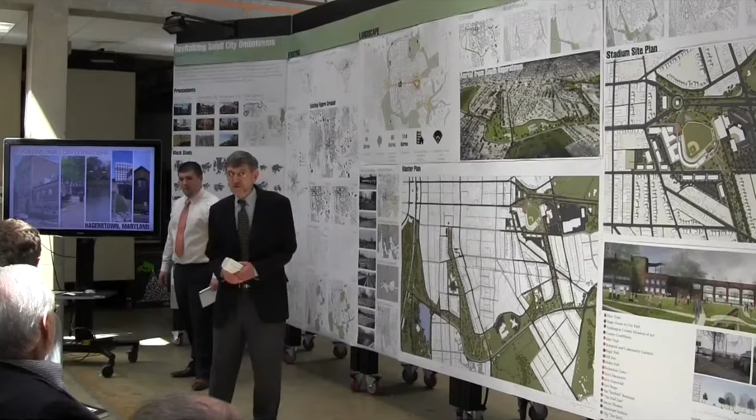The exotic Copenhagen. Tim McCartney is equally exotic. Hagerstown, Maryland.

Good afternoon, my name is Tim McCartney, and my thesis deals with revitalizing small city downtowns, and as Herb just said, it's in Hagerstown.

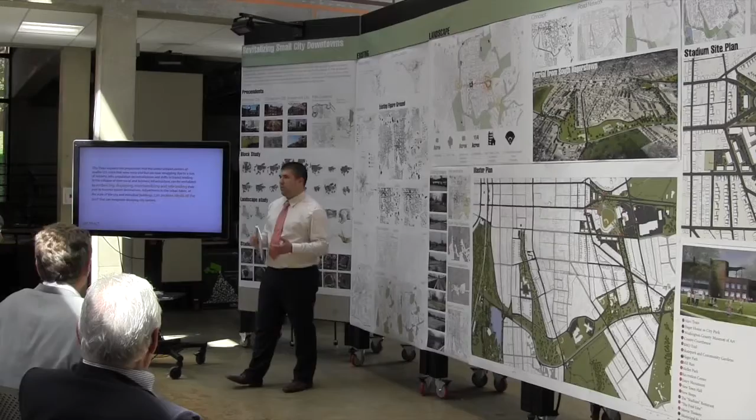To place Hagerstown in the state of Maryland, it is in Washington County, in western Maryland, and it's still considered part of the Baltimore-Washington D.C. metropolitan area. In Washington County, Hagerstown is located to the northeast, and it's the seat of the county, so all the little cities form around it.

This is an aerial of what it currently looks like, where the hospital has been removed.

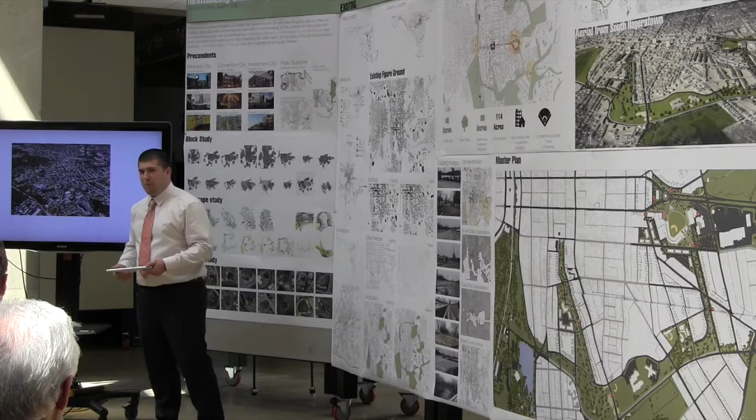The history of Hagerstown: it was formed in 1762 by Jonathan Hager. In 1810, its first census had its population at 2,342. In 1814, when Washington County separated from Frederick County and Hagerstown became the seat, they changed its name to Hagerstown from Elizabeth.

In 1862, it became a staging area for the Battle of Antietam in the Civil War. There is a historical cemetery that sits right here with a lot of Confederate soldiers buried in it. Then in 1867, this is when all the industry really started to form Hagerstown.

It affected the grid of the original city of Hagerstown, as the railroads used to actually make a complete loop around the city, effectively naming it the hub city. There was a lot of railroad and industrial traffic within the city.

In 1960 to 1980, interstates came around, and all that industry pushed toward the interstates because shipping was cheaper. Everything shifted outward, people moved to the suburbs, and the population started to decline.

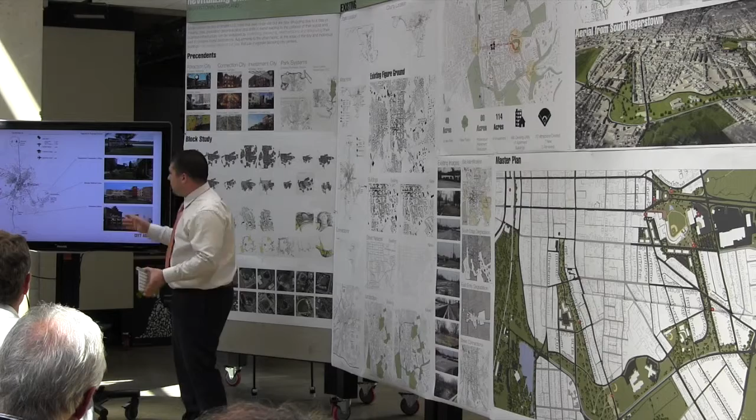Hagerstown also has a ring of shopping around it, and the Meritus Medical Center, which is brand new—they moved the hospital out of downtown to build it. They also have their own airport and a series of shops, and the Antietam Battlefield is only located 11 miles outside the center.

Right now Hagerstown is still pretty connected to the DC metropolitan area by Interstate 70 and 81. Maryland still owns the existing right-of-way of the old Western Maryland Railroad, which is currently just sitting there, which could be a huge opportunity.

As we get closer to downtown, you start to see that Hagerstown has a huge cultural center here, which has the Roundhouse Museum, Museum of Modern Art, Museum of Art, and several other little museums, all formed within the city park, within this big green space.

While looking at Hagerstown, I looked at the economic issues that face it, and I realized that a lot of the people downtown are underemployed and in poverty, and that's affecting downtown because shops can't sustain themselves, so they go out of business. So the idea is, how do we attract a diverse population with multiple incomes to help revitalize the city.

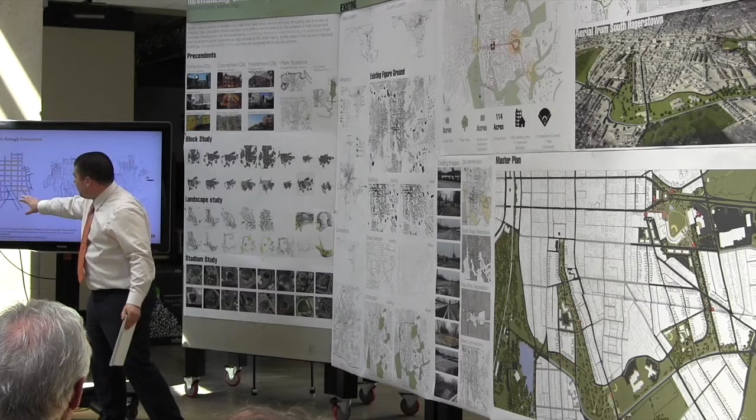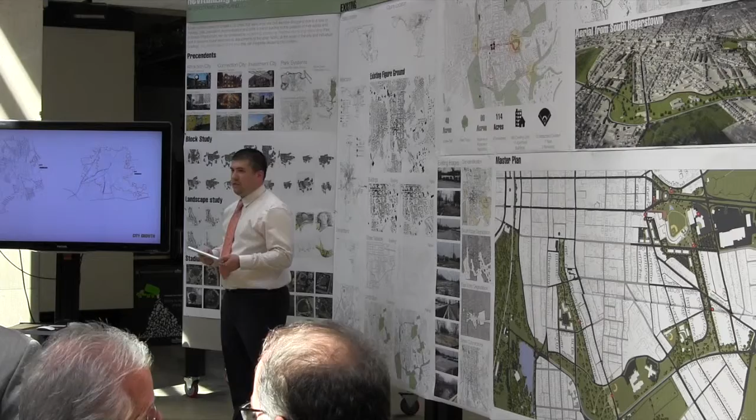Why does that happen? Is it to increase the tax base? I haven't figured that out, but they just keep buying land outward - that's usually why, for the tax base. So their population doesn't decline because they constantly buy more land, but the density does decline because a lot of people are just out in the suburbs.

Some other issues I've found are that on the south side of Hagerstown, you see a huge degrading of the urban fabric, so you start to see the voids that have been created by industry that is now dilapidated or falling down. That creates a huge opportunity.

Also, the east entrance to the city is a series of car dealerships and small fast food restaurants. You go through this and then all of a sudden you're in the historical downtown - you're like, well, how did I get here? There's no celebrated entrance to the city.

Also, through observation, I noticed that the grid of the city is stronger going across the north side, but it's obstructed going across the south. So the connection to South Hagerstown is very little, and that's another opportunity to fix and bring more people downtown.

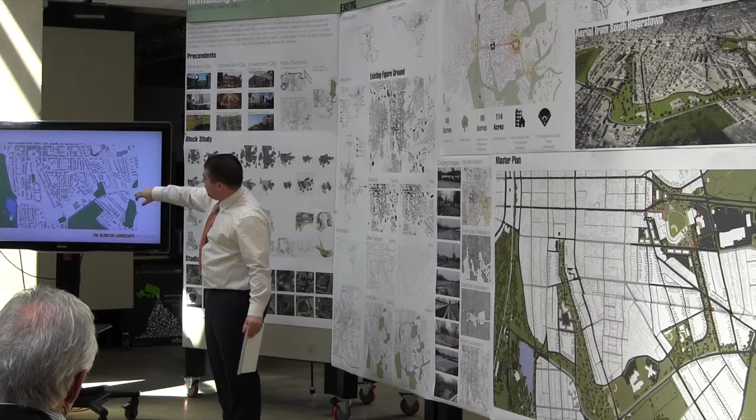This is the original park system in Hagerstown. It's kind of fragmented—this is the city park, and then they have some little pocket parks that go along it. There's a canal that runs parallel to it, and then it dumps into the river by the creek down here.

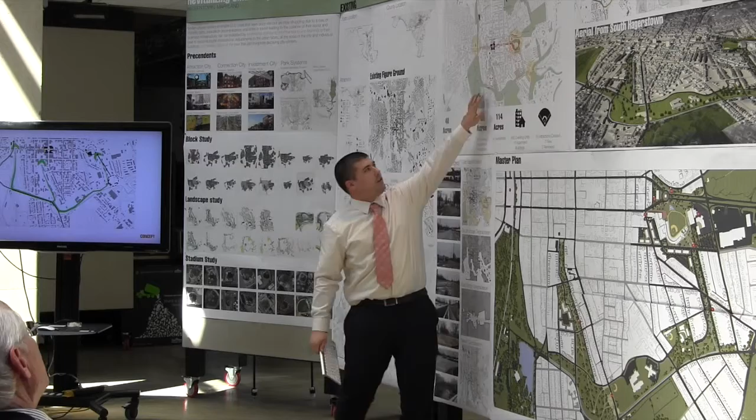So the idea is to create a series of parks that start to link those parks together. And then the next idea was to grab those parks and pull them into downtown, as well as grab existing things like the baseball stadium, located over here.

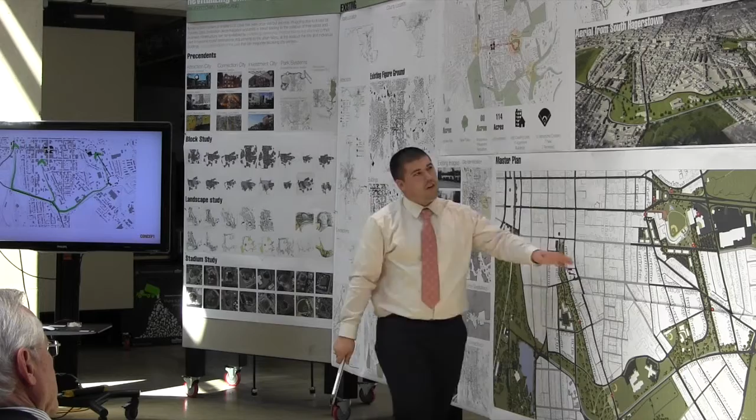That is currently up in the air whether they're going to stay in Hagerstown or not. So the idea was to pull that closer to downtown, pull the MARC train into downtown, so that Hagerstown becomes better connected to Washington, D.C. and Baltimore, allowing more amenities to be closer to downtown.

So this is the idea of pulling those green spaces up toward the center. And then the idea of using that existing right-of-way that Maryland owns, allowing this right-of-way to connect to the MARC line that runs to the south of Washington County, pulling it up into a historical railroad station that already exists in Hagerstown.

Tim, where is that on the big map? Just point out where the station is. It's right here, and Main Street is this one. Where's the train tracks over here—is it the white? The train tracks are right here. They kind of die in this area, and it comes up and around.

That would be the new commuter rail. Right now there's no rail system attached to the right-of-way, but they still own it, so there's no use on it. It would connect to the existing MARC line that runs from Washington to Martinsburg.

So then I got back to my places diagram. The idea is to create the MARC train on one side of Hagerstown that creates tension with what I'm calling Hager Park on the east side. So people coming in on the train have to walk through downtown, experience all the little shops, and then come to a baseball game.

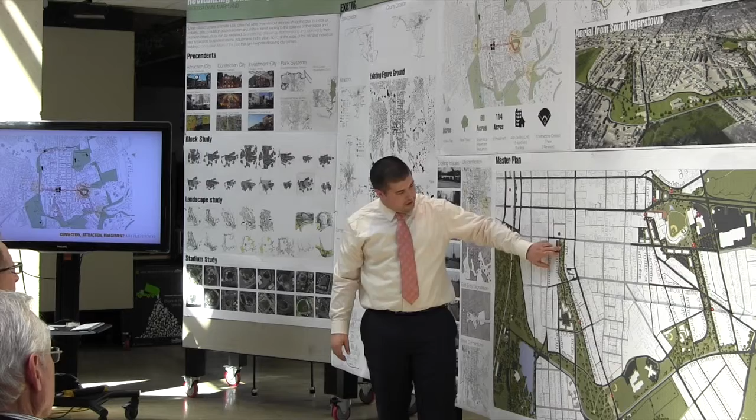It also sits between the two ridges you've seen earlier, so it's where all the water is collecting, creating sort of a retention area to clean that water. Then it forms, at the end, one axis with the courthouse that sits behind the town square, giving a face in the park from the courthouse.

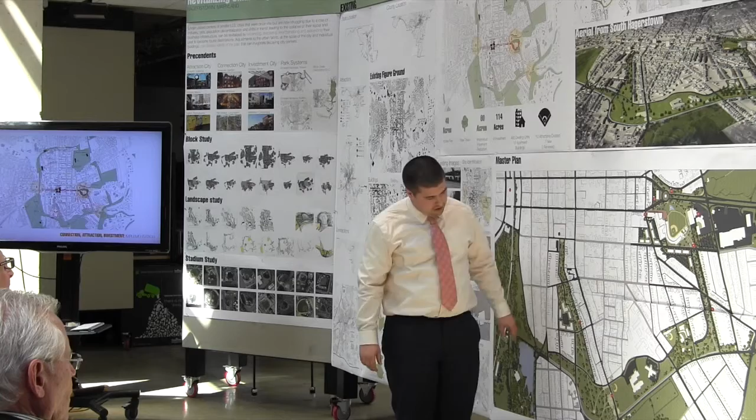As you go over, it connects all the other little parks and creates another greenway that creates a buffer around an existing canal that has been channeled, pushing up into what is the stadium site plan, which I'm calling Waller Park. Right now it's a stadium attached to a movie theater, with commercial properties on the ground floor, residential properties above, and parking on the bottom two levels.

Is that canal part of a historic transportation canal? It was part of a historical mill that sits right here—they channelized it far out, but it used to run into the mill that sits here. Is it a running course at all? Yes, it doesn't move very fast, but it still has running water in it.

So the idea is, how do different people get here? If you're coming from the green space, you go down this park and enter the baseball stadium, and you can see the canal. I thought a more sustainable way is to vegetate the canal, which is something I've learned over time, and that would help collect all the pollutants from the pavement.

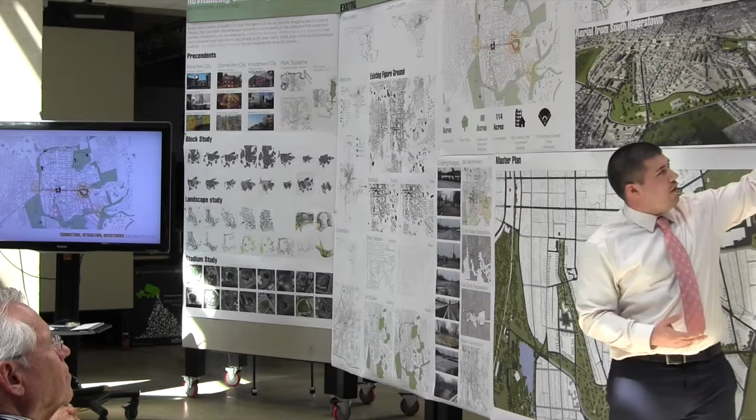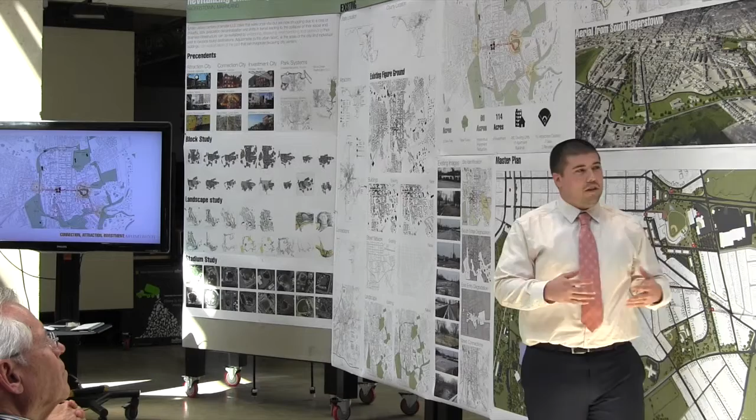If you're coming from downtown, you would enter through the main entrance, which is on axis with the main street, and you would enter this plaza area, which I feel could be used for anything. They could hold parties out there if they wanted, or project a movie on the screen above the entrance. The idea is that there's a restaurant that looks onto this plaza, and then the entrance into the Suns stadium and the movie theater, with apartments rising above it.

Did you design that, Tim, or does it exist? I designed that. This is sized for a Class A baseball team, which is what Hagerstown has now and has had historically. They are thinking about building a new stadium.

Is there any existing parking that's useful to you? There is an existing parking garage I'm going to use with 232 spaces, and I'm creating a lot of parking along the green space to help with that. There's also the idea of the shopping center giving away some parking spots for events, which might help their commercial activity since those people may buy something and go to the ballpark.

You might want to walk people through how the stadium complex works. As you do that, clarify what's existing versus proposed. All of it is proposed, including the stadium. So why baseball?

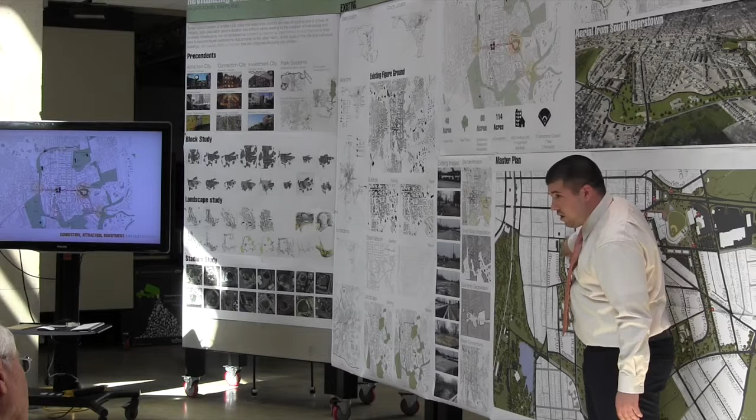Not the residential, just the park? Well, some of the residential around the park is new—the shadow buildings. The buildings without shadows around the park are existing, not newly designed.

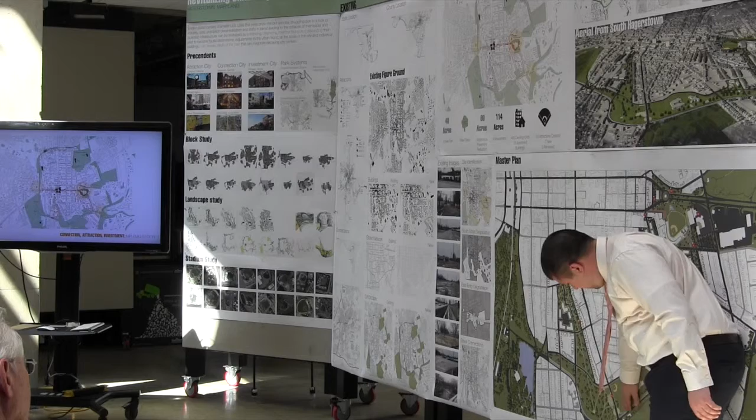And you designed the station? Yes. And the green space, or is that existing? This area is new, up to here, which is where the school used to be—they just moved it over. This is an existing green space, and then over to here I start designing again.

So you're connecting these existing pieces? Yes, I'm stitching the existing parts together.

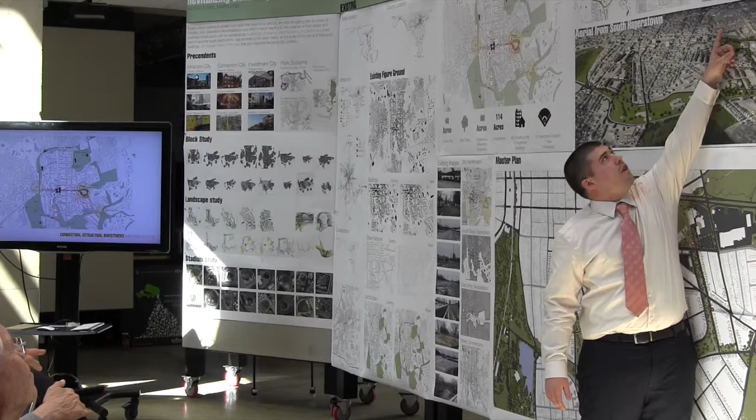Do you have that diagram you can put up? Yeah, it's his diagram right there. Where? This diagram—the darker areas in a lot of these diagrams, those lower two diagrams, are existing, so this is existing, and this is what I was doing.

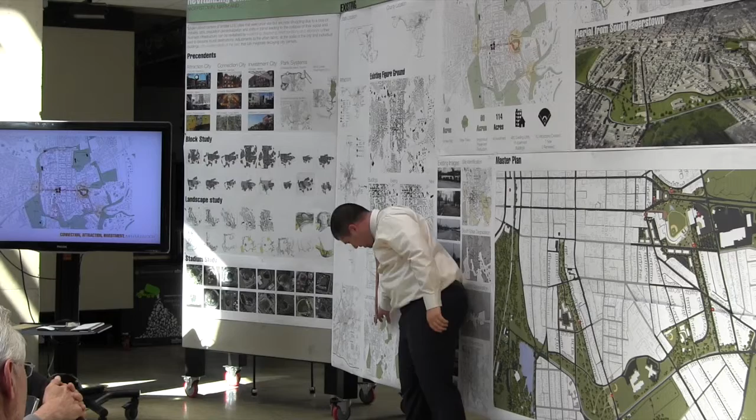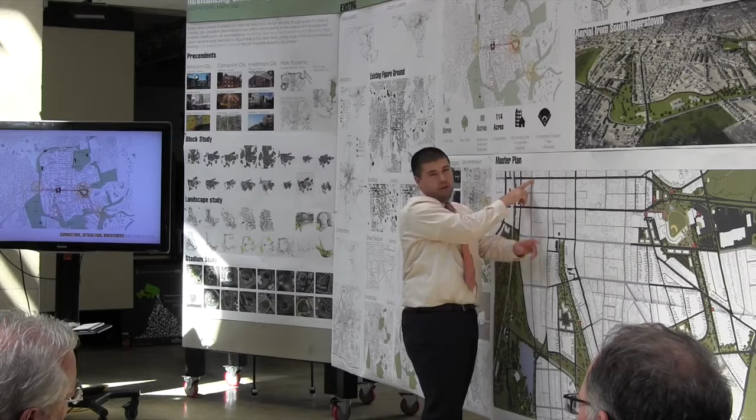Is this a one-way coupling, these two streets? Yes, they're one way. And that's the stairs, yes, and that's the principal entry into Hagerstown from the east, as far as I know. You come into Hagerstown down this street—those are one-way couplings.

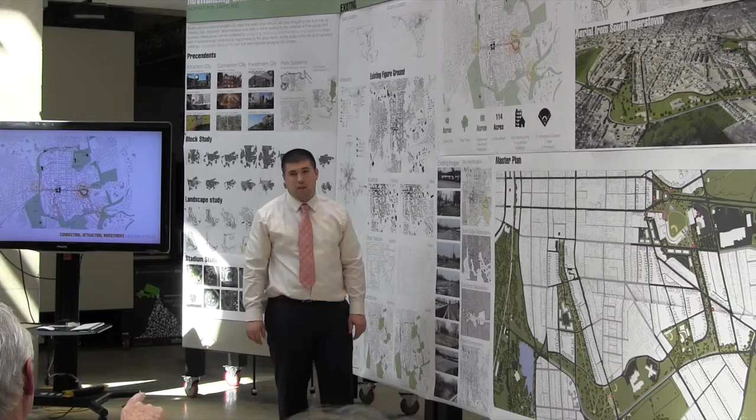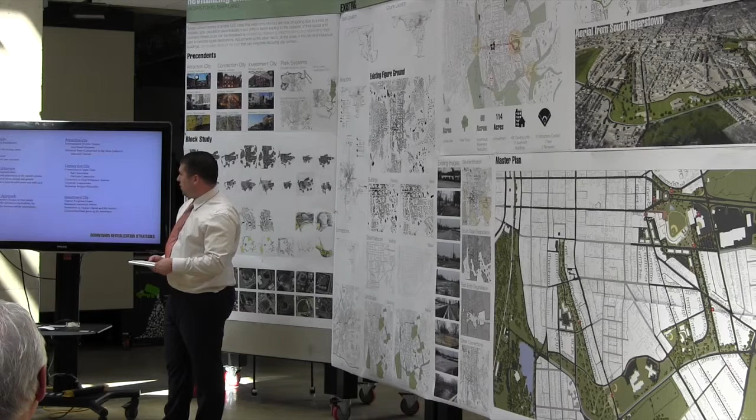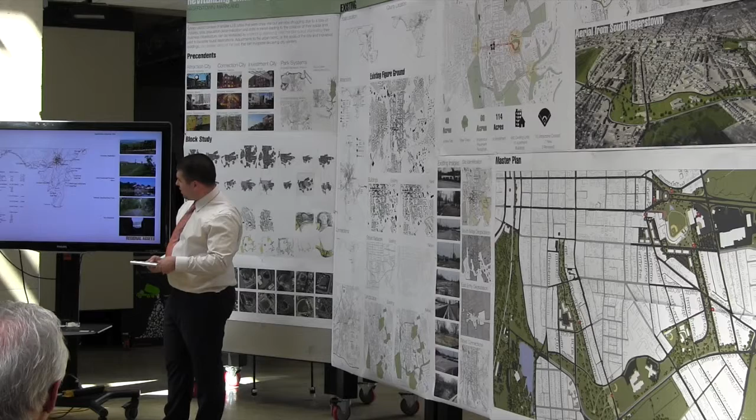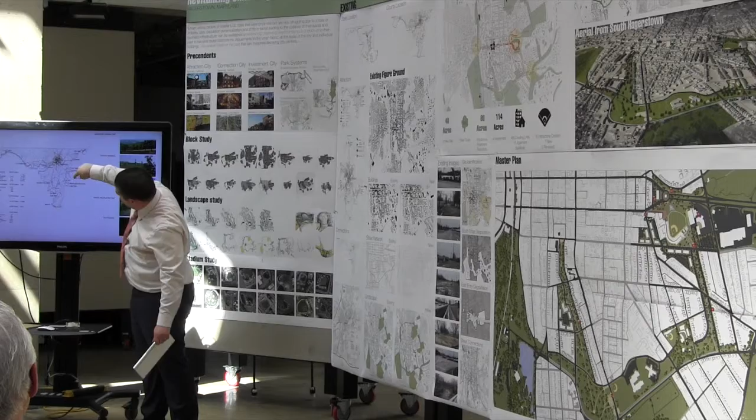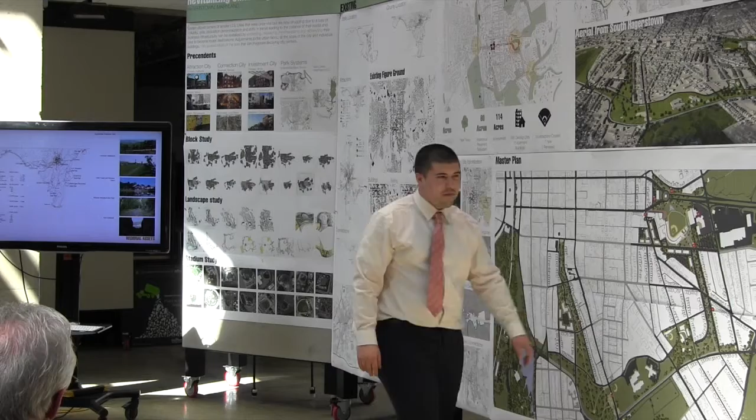Now explain that, now that is all clear. All right, so when you're coming up this park system, you enter in from the ground level. You either go up to the second level and buy your ticket, the mezzanine level, or you can go into the little shop or Hall of Fame that they have. There's a lot of these little baseball stadiums that have a little Hall of Fame. And then the mezzanine floor has bathrooms which they can access from the mezzanine floor.

But then if you're coming from Main Street, you're coming onto this axis, which is the creation of that plaza. And so the idea was to create some kind of decking element so that you felt like you were in this hip spot of the baseball field. And then the idea is you use the main concourse, which has the concession stands that supply both the movie theater and the baseball stadium.

And then, yeah, you move along the concourse, or you go into the movie theaters from this level. And then from above that, you have the projection rooms and the apartments. For the apartments, you either enter from here, this is an entrance to the apartment, or you enter from here, or you enter from the parking garage and go up.

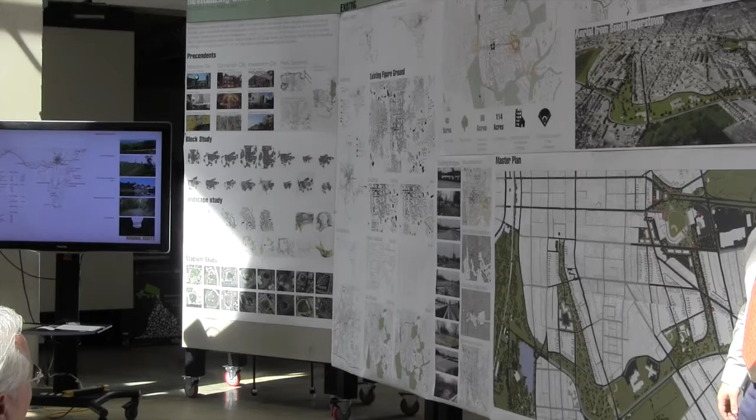That's good. I wish you had shown that as part of the basic idea of managing this water and dealing with it. I also don't really see it in your plan — you talk about adding plants there, but that's a little timid. I would have thought you would really celebrate that.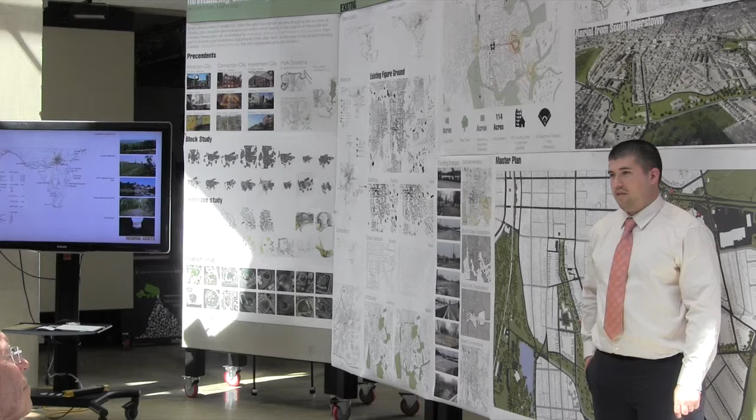So a lot of this would be retention areas, but I don't see it in the plan. What it appears is that you put the field right over the water. That seems like...

I like the idea behind a lot of what you're proposing. I think there's a move to say, okay, we can extend this.

We can extend this passenger rail to anchor one side of Main Street—that's a strong idea. Then the thought is, what if the baseball stadium becomes a new kind of celebratory anchor on the other side, and what happens in between? That seems to be the clearest portion of the proposal.

To me, the other park space, while interesting, might be a phase 2. It's hard to see it on an equal plane because it's so much investment at once—I think you need to prioritize.

I think it would be interesting to think about what a baseball stadium uniquely Hagerstown would be. When you look at different baseball parks, some become an emblem of the city because of how they're integrated into the neighborhood, and the strange things about the field that creates.

Rather than just wiping out these industrial buildings, could you carefully position this and say, what does it mean to put it on top of a canal? That could be a new kind of experience of attending a baseball game. Or what if you were sitting in the old industrial buildings, using that as leisure and party space? I think you could invent a bit more based on the conditions and situate it according to those opportunities.

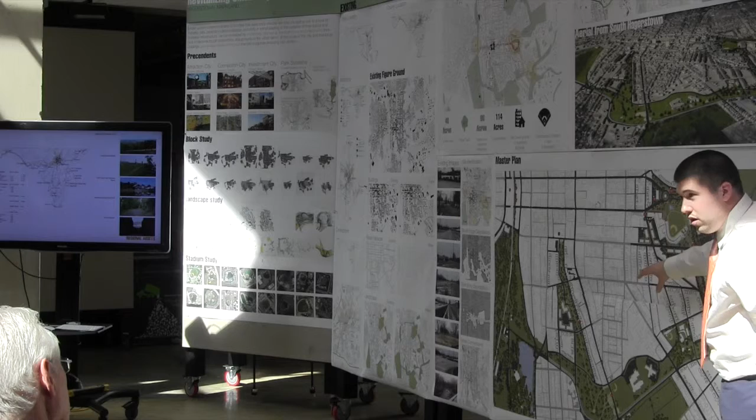So the watershed—there are bridges that run along it. The idea is the water collects into this central space, following natural valley lines, and then runs down to what disappeared from the drawing, Antietam Creek, which flows out to the Potomac River.

So is this all surface water, or is it combined sewer—do they combine sanitary with stormwater? I didn't look into that. A lot of older cities have combined sewer systems under EPA consent to separate them, since water quality and draining contaminated water into homes is a problem.

I'm trying to think about the reason for the big investment, which this is. You talked about flooding at one point and pointed to the area down here—but where the baseball stadium is, yeah, because of that canal being there.

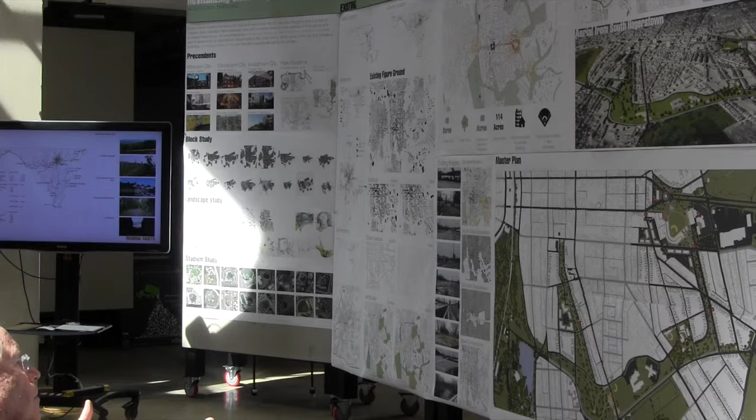Those are opportunities to think about where you start creating your wetlands park, your series of retention and cleansing ponds, across the whole city. You probably solve a lot of the problem by disengaging stormwater from sanitary and capturing all the street water. Your idea about 40 acres of new park and 520 new trees is a compelling story if there's a clear reason for doing it.

I think what has, for me, been the tension is between the ring of parks and the skewer through the middle—which dominates the idea. And what dominates in the drawings is the ring of parks.

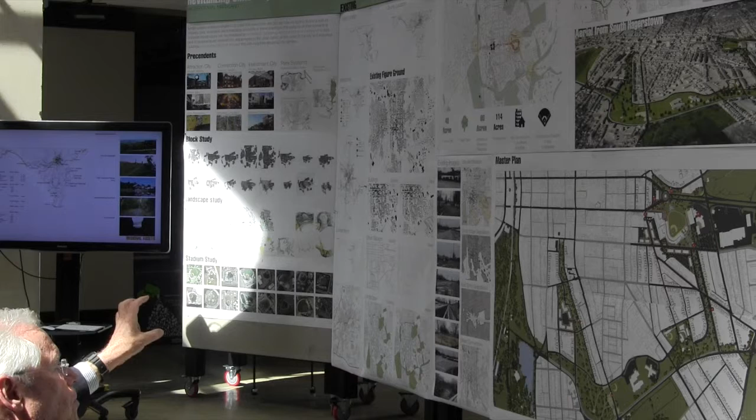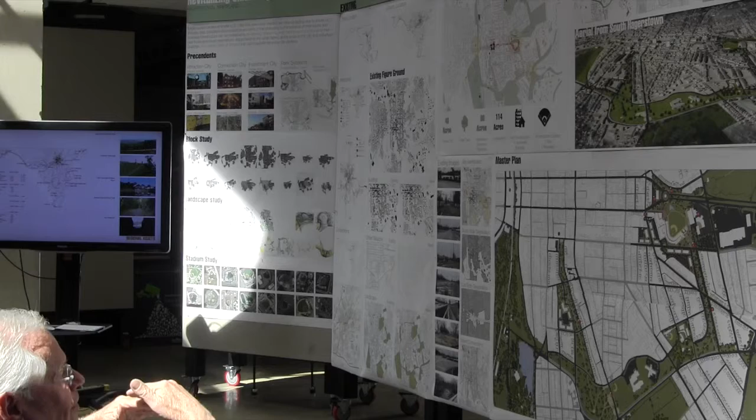But you talk about this being a destination city, an attraction city. The baseball stadium is obviously an anchor point, and the MARC station is another anchor point, which isn't celebrated the same way. A lot of these cities with coupled main streets have real problems because they can't support retail on both streets.

How do you solve that entry problem with the dual street system in a town that doesn't have a large population—it's a big urban issue for this size of town. I think your idea of investing in attractions makes it more of a regional destination than a local one. Maybe this train connects down into Washington, D.C.—or maybe I misunderstood.

Yeah, that's what the MARC train would get you. So in that sense, you could have events take place in Hagerstown as a day trip from Washington, making it into a really big event and creating a draw.

And the park system is a plus that goes along with that. But to me, it's experiencing this historic city and the ability to get to Antietam and other places from this drop-off point that would really make this economically viable.

What is the follow-on? That's very much the point. A minute ago, Renee asked about the main driver aspects of this thing, and Tim went through the industrial history of this place so quickly. They didn't mention all the amazing industrial things that happened here - the organ company, several airplane companies including Fairchild, which was located here and eventually bought by Martin. I don't know, it's in your document, Tim.

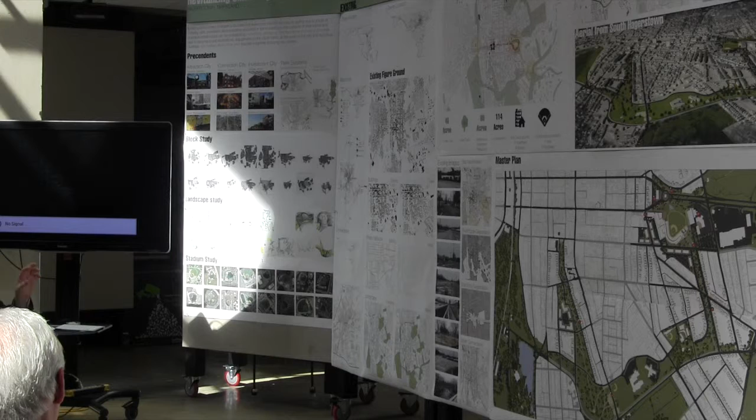There's an awareness on his part that there's already a huge tourist industry immediately in the region waiting to be capitalized upon, simply by making that group of people aware of all these other interesting things here that are celebrated in existing museums. But the museums are spread out in various spots, and what the park system does is pull all that stuff together as an asset.

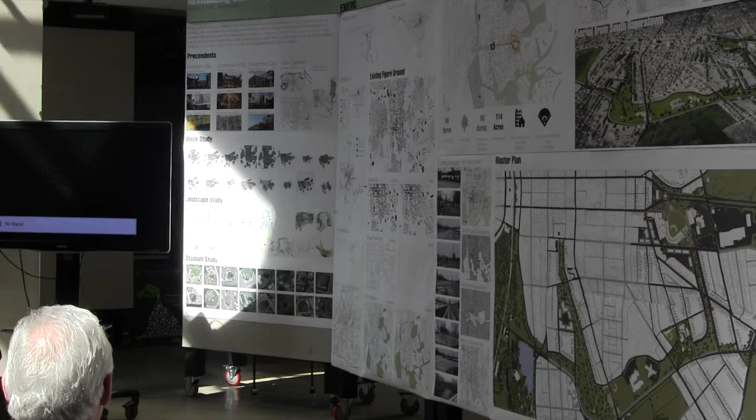The other recognition on his part was the expanding population in this region and the emerging interest in good small town life, and being able to connect that with the commuter rail system tied to the larger community as an economic engine. What we're seeing is people moving to places like Hagerstown because they can't afford to live in Washington, driving down 270 and spending long hours on commutes because of housing costs.

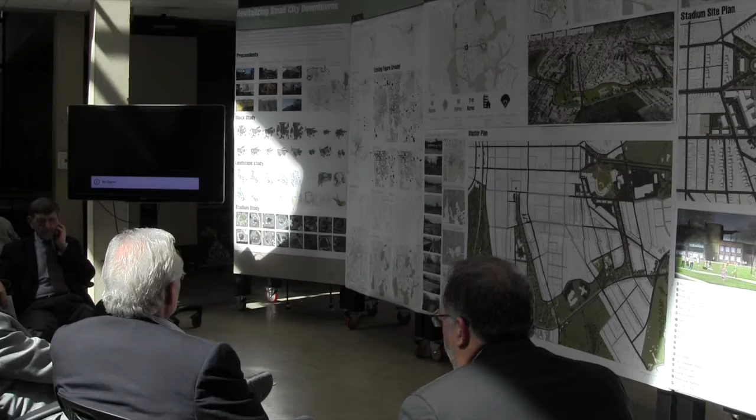They're actually proposing to expand 70 and 270 to fit all the people traveling - talk about a crazy way to do things, they'd rather invest in interstates than commuter rails. But I think there are also people choosing to live in places like this because they'd rather live in a small town. Yes, no question - Hagerstown is very quickly growing into the Washington-Baltimore suburban region because of it.

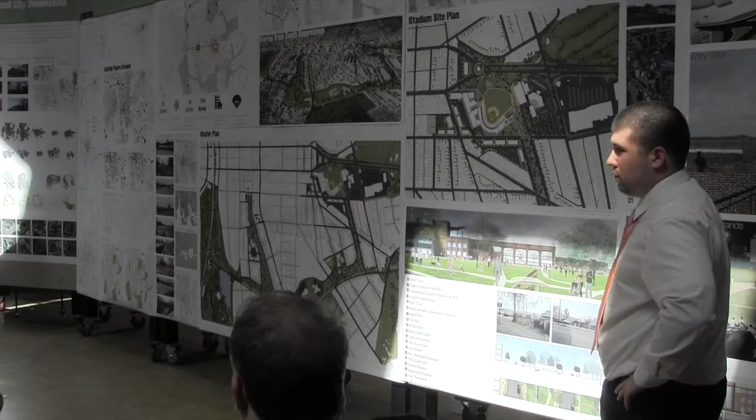You didn't talk much about the, I think, good planning basis. I have a harder time feeling warm about the building, though.

In terms of what's the architectural intent - or maybe I should say, did you really design that, or?

So I designed the bigger thing for most of it, and then I tried to get down to the scale of the building. So the building isn't as figured out as the rest of it, but I did try to design the building. Material-wise, I looked mainly at brick because it's a huge company in Hagerstown, so the idea was keeping the majority of the facade brick.

And then other than that, wasn't there also an idea, Tim, that the industrial area could be the inspiration for some of the language of the stadium? Yes. I think this is almost so comprehensive that it almost becomes too much - you need to pull out strong things and the ideas so they really pop out.

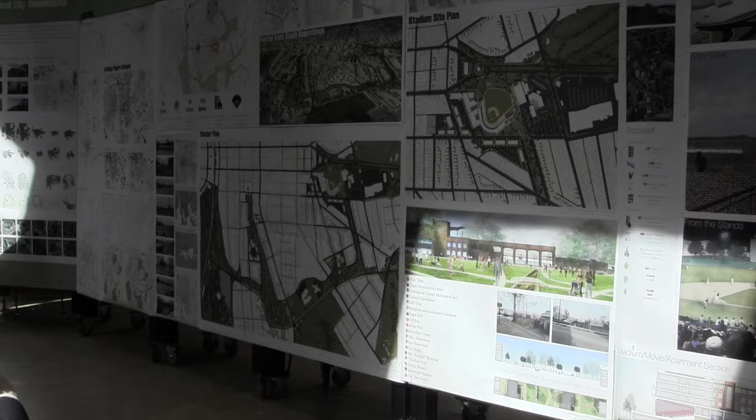That one diagram of the ring, to me, is the most important diagram here. The second one is the one in downtown, which shows the Main Street idea - we've shown it as a single street, but you told me it's one-way, so you've got a double street. But that idea and the whole entry into downtown becomes important - how you enter from 81, how you enter from 70, all become important in this regionalism notion of how you make this a destination.

Having gone through Hagerstown to get to Antietam, there's a beautiful drive through that area that most people don't know about unless they're going specifically to the battlefield. Hagerstown is almost a leftover - you want to get past it to get to the destination. But if you could set this up with festivals and other things happening here, and people come to Hagerstown to stay and connect it to Antietam and back, then it becomes a weekend destination and begins to build the market.

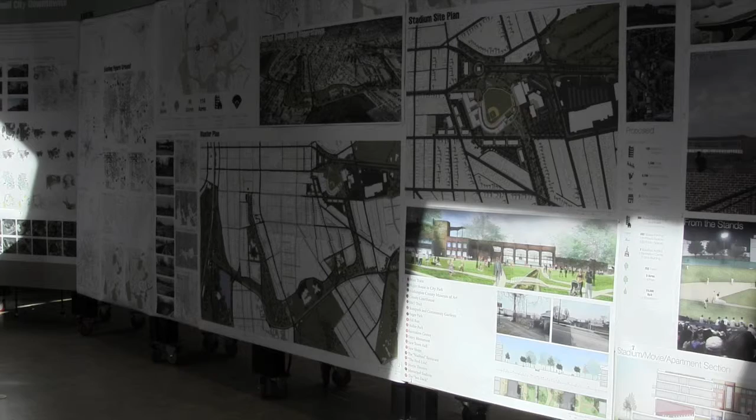What is the foul line? I stopped putting dots up here because it started covering the whole stadium building. So the idea was creating a series of decks - like this being one of those decks they have at baseball stadiums, the unique ones where you can sit out there and watch from the tower. And then the other one being the sun deck, because of the Hagerstown Suns, they have to have a deck at least named after them.

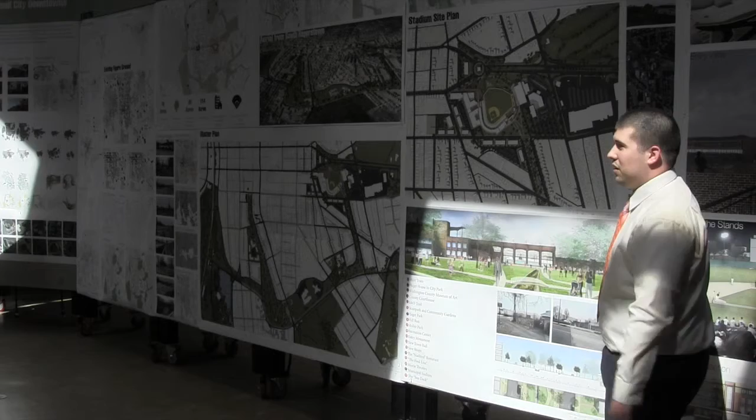Creating another one over here where you could sit and look down into the baseball stadium. So yeah, I just didn't want to keep putting red dots on top of the building.

You know what I think might have made this whole thing better is if you did a little bit less. I think it's actually true of the architecture. The comment was made in terms of the design of these parks. It feels like a design, but it doesn't feel fully fleshed out or thought through. I wonder if all of this would have been better if it had been a little more diagrammatic, a little less illustrative, a little less explicit, and more about principles—applying to both landscape and buildings, talking about intention and principles rather than suggesting these were final designs. Might have all worked better, more like this drawing.

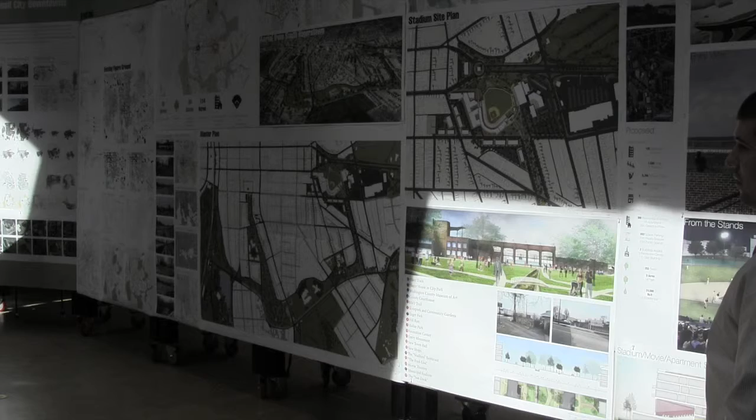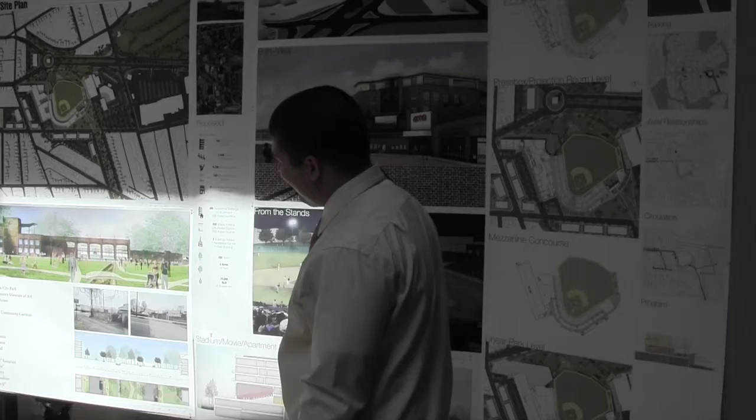Yeah, I mean, I think that's a terrific drawing, but I think there are things in between that and this that could have been more successful than actually getting down and delineating pathways with that level of precision, or individual trees that specific. Well, considering Michael refused to really draw trees for a long time, this was a big improvement. He suffered from what a lot of architecture students do, which is thinking all trees are the same, and therefore we don't need to draw them.

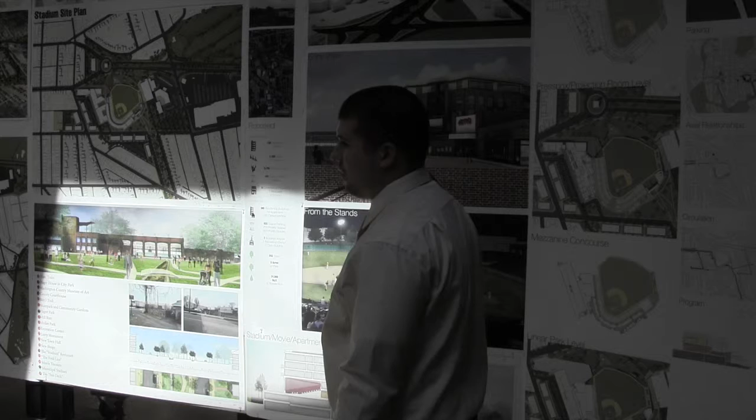Because at one level, if you only deal with principles and generalities, you never get down through it, and you never learn to do all that stuff where you get down to it, even if it's not. I suspect, Michael, it would be easier for him to do now that he's done this once—easier for him to do what you're suggesting now that he's made an illustrative plan and can go back and make the generalizations, which is a new experience.

Great learning experience. So yeah, my point would be, might have been a better package if it was like that. But no, I think you want to push yourself into these things.

Maybe, along a similar line, there's so much on the page—or the presentation—but actually there are a couple of really key moments that communicate the intention a lot. And I think if you had worked harder to explore that intention, it would affect the clarity of what's really important to you. I think it's hard in this to identify what's the critical catalyst, or what's informing the character of the architecture.

It's a kind of broad brush, but I think, as I mentioned, that diagram kind of hits the nail on the head. And I think that rendering is getting there too, in terms of communicating a character about reuse of industrial space and public space, and it has a bit more of an ephemeral quality than some of the others.

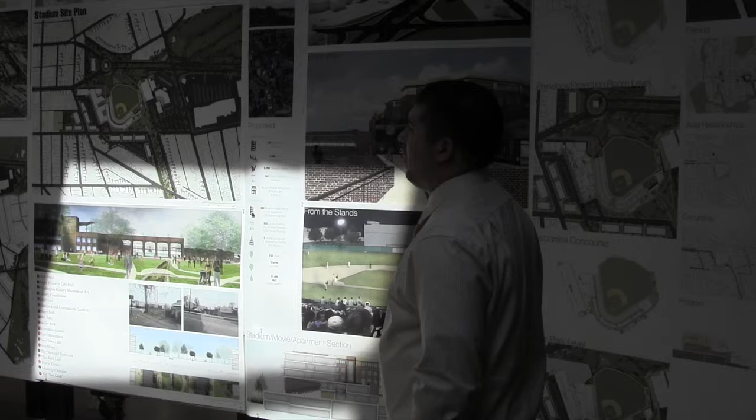One, the value of the more abstract stuff. I was thinking about what you said in terms of—actually, I've been encouraging you to take this stuff back to Hagerstown and sell it to the town fathers and mothers, because you can imagine they could actually get quite on board with this idea. And those kinds of drawings we're talking about would help communicate that very, very clearly to them.

We're thinking about how you talk to clients, right? And I think the point about incorporating stormwater management into it could give it the teeth. And the second thing, you would convince all these people to go with you to help you.

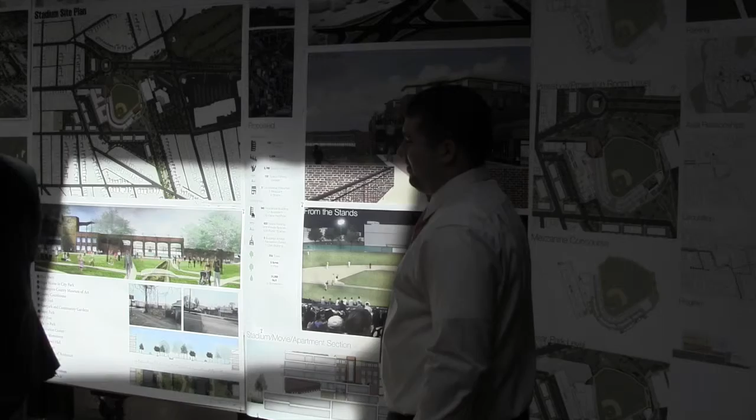Terrific job, really. I think these comments are really speaking to the scale and depth at one level of what you've attempted here. And he's right, you ought to package this, bring it up there, and make them watch your presentation about it, largely because I think the business of you identifying both models that the city could emulate, like Easton or other places, and also some of the physical challenges that the city has, is a very sophisticated, two-handed way to deal with this, and I think that it's extraordinary.

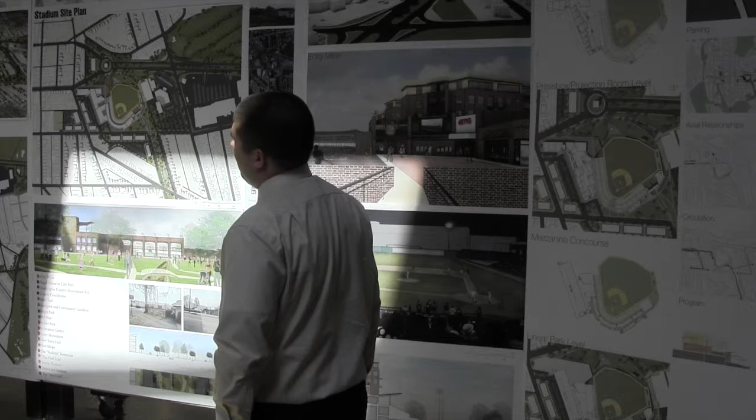The problem is, with places like Hagerstown, it's a little bit like somebody who used to weigh 200 pounds and then they lost a lot of weight and their clothes don't fit anymore. You have all this infrastructure and museums and things, and you need something to try and tie it together. It's interesting people talked about the scale of the park system.

Because if you look at this, really, I think there's just a couple of moves - that and that and that. Really, the big parks are already there. So the idea of introducing them to link them, I think is actually more modest than it seems. And one of the reasons why I think that's key is because I think what you would probably end up doing is having a real estate developer partner with you, because adding a park and then developing houses that look onto a park is a surefire way to add value in the city. It's a lot different adding a house here than it is adding a house here. The value proposition by adding green space is significant. And in a place like Hagerstown, you would probably really very much need to do that.

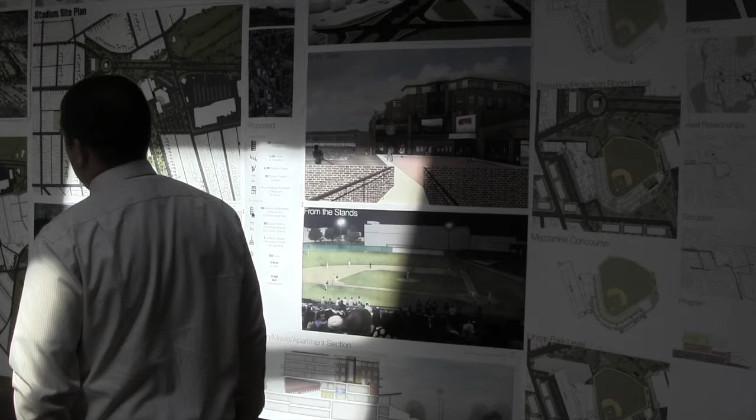Tim's research into Hagerstown and the problem of Hagerstown, which I think he went through a little bit too quickly, was quite extraordinary. And really, the discussion we had in the committee about Antietam and how far these things are away and how close, the railroad infrastructure, and all the museums, and how to memorialize all these things that Hagerstown has been about historically versus what it's about today. Tim moderated those discussions and brought that information to us in a very sophisticated but very simple way, and I certainly appreciated that.

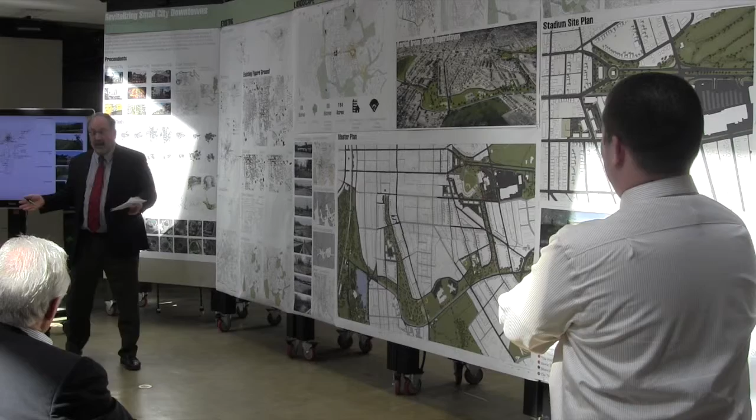And Tim's been almost apologetic about doing a project in Hagerstown. It's like, well, I'm going to do Hagerstown, and then as he dug into it, he found out there's actually quite a bit more there than even he thought, and he knew quite a bit more about it than Steve or me or Lily Van. So the whole research aspect and the whole idea of trying to figure out how this place works into this larger regional picture and the problem of the small town, I think is really what this is about.

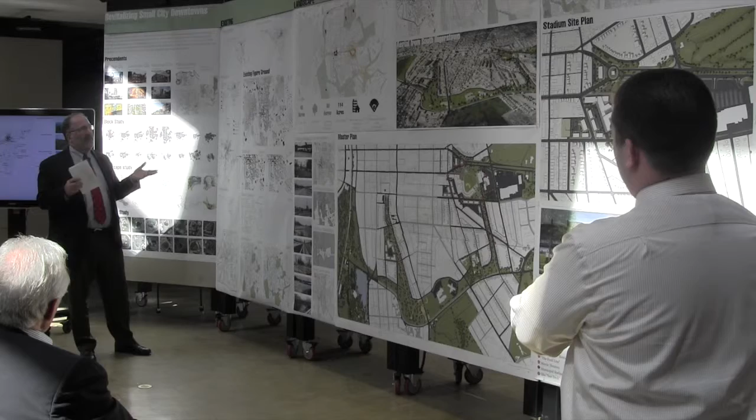The business of figuring out the topography and the Main Street, the train station, ballpark - I think you guys are right. I think that's really one of the critical ideas about this, is you can put that in the depression, get it closer to downtown, use the parking resources. It may never activate all of Main Street, but it will certainly help. And one of the other reasons it will help is because minor league ballparks, that's 70 nights a year, right?

Maybe you might have 10 or 20 other motocross events or old rock star reunion tours and things like that at the stadium, but they're not that many things. So by adding the movie theater and by adding the residential there, you start to program this into something that gets a little bit more nexus of activity.

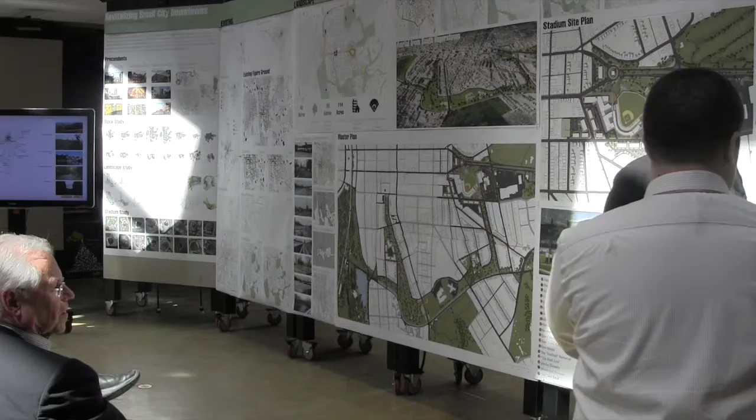I think also, Tim went a little bit quickly, but these plans, even though they're pretty schematic, have worked out very nicely in terms of making sure there's a believability factor to how the thing works, and that the shared use of the concessions with the movies and the residential is all something that I think Tim patiently worked through and made into something which is quite believable, but also adds to the simple program of the ballpark, which I think is really something quite noteworthy.

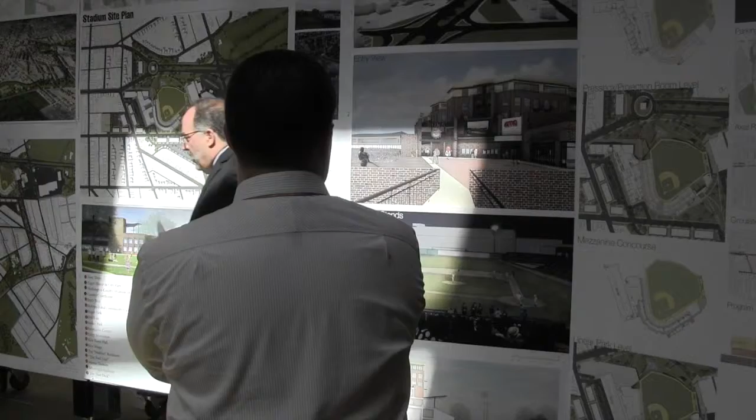Tim, it's been a real pleasure to be part of this thesis. I learned things about Hagerstown I never thought I would learn, and I appreciate your dogged determination to make sure that the rest of us understood those things as well. Terrific job.